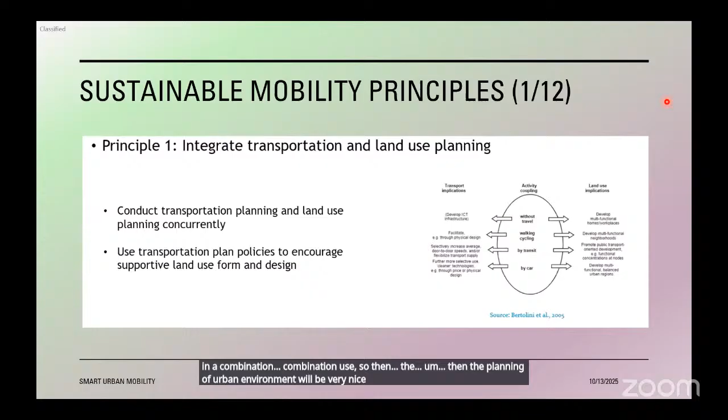And protecting environment - all sustainability will start with protecting environment. That's the first thing. It could be going green, less power consumption, renewable energy, using green energy, using ecological energy sources, alternative vehicle management. So all of these together come under looking at environmental protection.

Efficiency also improves when we have better environment protection there. It could be usage of natural gases, it could be usage of less air pollutants. All of these contribute to the overall sustainable environment.

So, social objectives again, right? When we are growing into this sustainable mobility, are we disturbing any social objectives? Livability, also social ecosystem, urban environment, urban social living. So that's the reason more cultural differences are going to come if we have any disturbances with the social living.

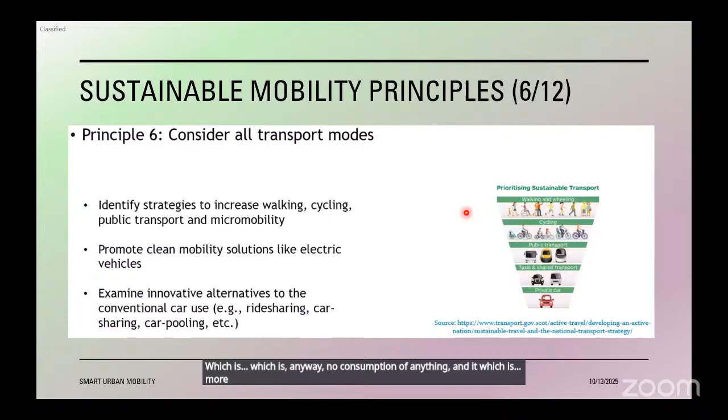And then, so these are different types of modes. Again, it's strategic transportation, which will be giving us transportation demand management. So the demand of vehicles, demand of incoming, is depending on the people coming into the cities, right? So that's where the congestion will be reduced, which will improve the future of the city, and then also less pollutants could come into the cities.

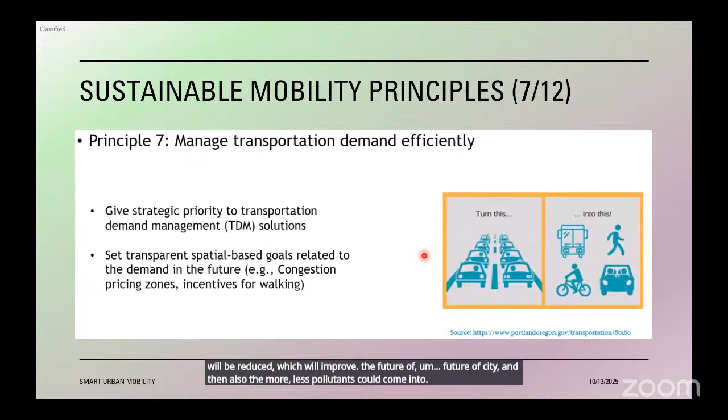So efficient way of transportation, with more supply friendly, and identifying different strategics, multimodal capacity of current infrastructure. So this is one of the aspects which I would say is well defined in developed cities, like you can see Paris, one example I could say. Also, London infrastructure is also another example, which is using this transportation very efficiently.

Like, okay, so if someone wants to go to his work location from his home, most of the times they have metro, but to reach the metro is not easy because they need to take again a bus or something, right? So rather they can take their own bicycle or EV scooter, and that can be carried within the metro, and also in the public transportation.

Then once they got down, they can use their EV scooter to go to their workplace, where EV charging facilities are provided in the office space, and they can get it charged and come back home in the same way. But I see this moving forward will become very big, and which will also enable that we do not need to use more vehicles here, but this really needs infrastructure development to be there, because safety concerns could come if you are driving on the same car path or bus path.

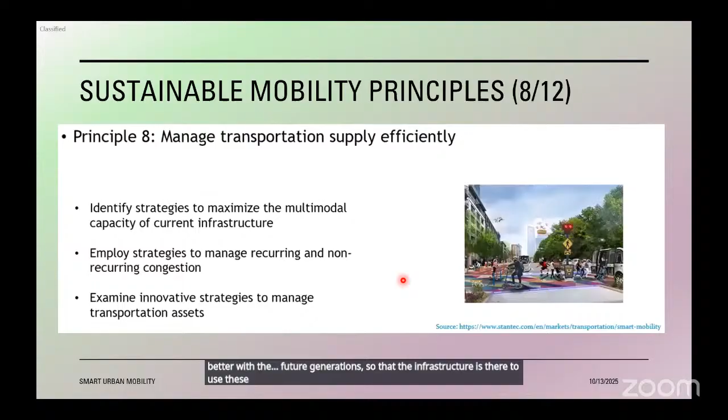So to make these ones, the strategic priorities, development priorities, the management priorities need to start from infrastructure development. These infrastructure developments need to start with the exploration, and then making those decisions at the right time, so that the installations could happen, and those move to implementation, and then the availability of development.

Also this needs cost, right? So it's nothing comes for free, so which will also improve. A lot of financial guidance is required to the governments, also to the management, financial institutions, to start funding and start looking at the gaps in the overall infrastructure. Also it improves the overall living standards.

Once these improvements have happened and cost has been spent, what is the return on investment? Whether those investments happened the right way, or return on investment is properly monitored or not, there should definitely be a framework which could improve the overall process. If there is no framework, it's all done and dusted, it won't give any indication that the improvement has actually happened.

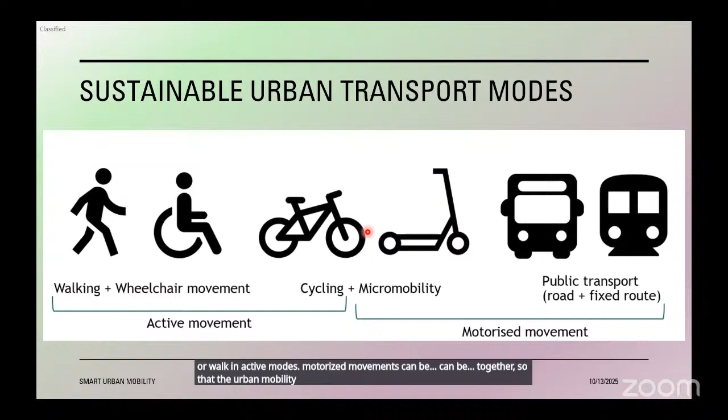So, main goals and general benefits for sustainable mobility.

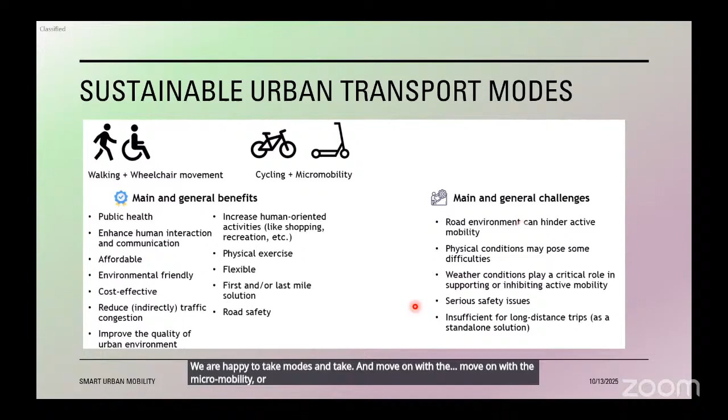With public transportation, it's more about roads and fixed routes - how we can benefit from each other. The main challenge is there's no possibility of a door-to-door solution with a fixed route bus or metro. The metro definitely has a fixed route - from that fixed station, we have to continue by walking, cycling, or motorbike to reach our destination. So that is not flexible, it is never flexible.

Is it time effective? Maybe yes, it is effective on time because we are not getting into traffic - there is no traffic congestion. It actually reduces traffic congestion if we are going by metro, but a bus may not offer the same benefit. Metro is more traffic effective and also socially effective, and the environment benefits more too. But for this infrastructure, we will go deeper into plans for how this could improve our overall life.

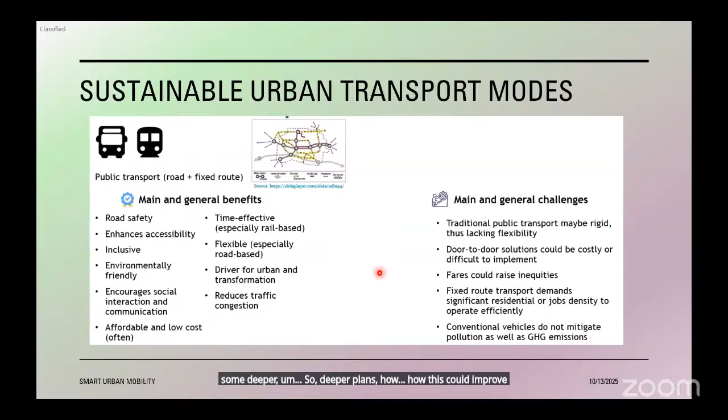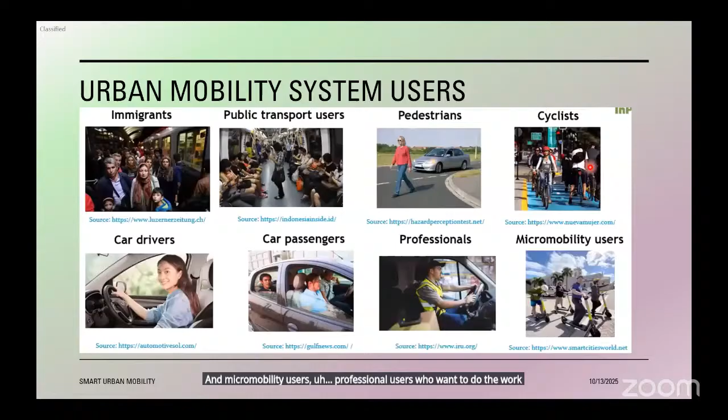So, urban mobility system users - who are all the different users using this mobility? Different people in daily living use urban mobility. These are all different people using different modes of transportation from one place to another in their daily living - could be immigrants, transport users, pedestrians, micro mobility users, professional users who want to do work, passengers, and car drivers - different people.

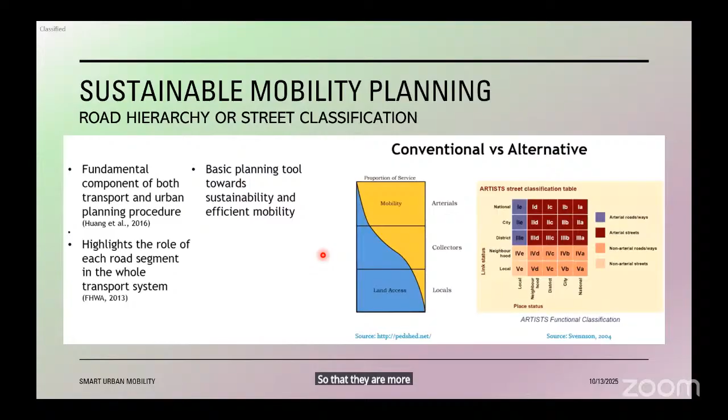There is a road hierarchy, or street classification. What are the different modes that could help us - whether implementing conventional or alternative modes between both? Fundamental components of transport and urban planning procedures are very important for city infrastructure development. There should be basic planning tools in place so that the system is more efficient and more mobile in urban living.

This is a road hierarchy or street classification diagram. You can see the city from 2021, which is a conventional city - they only have motorways, shown in black, the outer ring roads. They don't have anything else, and the rest is all primary infrastructure development. They do have metropolitan centers - multiple metropolitan centers in different places - but the transportation has congestion, and this congestion is increasing road congestion. It's also not environmentally friendly.

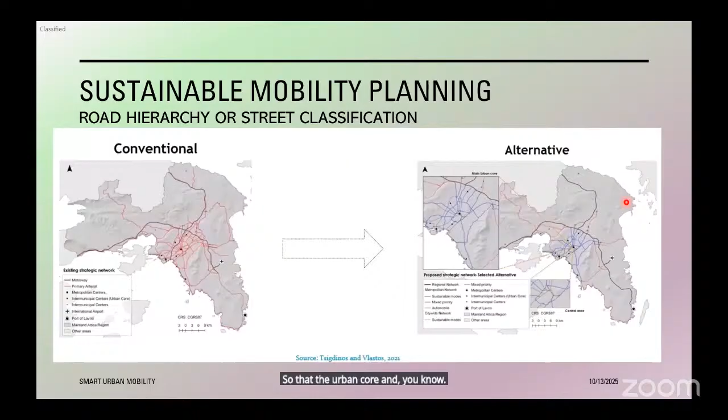Alternatively, they could think of mixed transportation - a regional framework with motorways, the black routes, but also an increased metropolitan network with metros, the blue ones, and mixed priority routes using sustainable modes, which we're talking about now - roads, metro, cycle paths, walking paths, all mixed networks. Then distribution happens across the city so congestion areas are reduced, and urban core living is taken care of in more sustainable ways.

So here is another example comparing the current model and the super blocks model - different models used in urban living. What is the current situation and what are super blocks? You can see the single usage, the right way of doing it, or you could say the wrong way of doing it.

This is one of the cities, in Spain, Barcelona, which is a more sustainable city. I think in the last 3 or 4 years they have won an award for sustainable mobility and planning. So what they brought in is an old style model and then a super blocks model.

In the old model you see cars, metro, and cycle paths. In the super blocks, no one can enter with a car inside the super block. So if somebody wants to use a car, they have to stay outside the super block model, and inside is only cycle and walking paths.

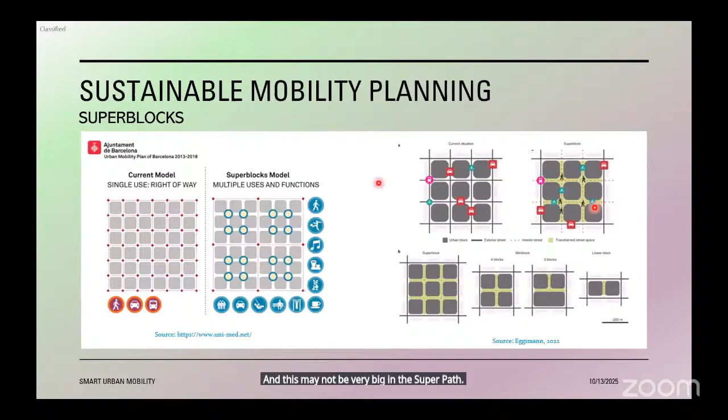This way, they are not allowing vehicles with more pollutants into the super block, so there's a recovery of air pollution happening within it. The super block has more trees and only cycling and walking paths. Transportation is taken care of, and even though it may not be very big, the healing of the environment, sustainability, and mobility are all taken care of because of these super blocks.

In these super blocks, mostly restaurants, play areas, coffee shops, public living spaces, and parks will be there. So cities could come back and build these kinds of super blocks, so that healing of sustainability and environment protection happens along with this type of implementation.

This is another city example, a city we have not yet seen - the future capital city of Andhra Pradesh, which is going to come with this kind of planning. It's mostly defined here as the current model and the super blocks model.

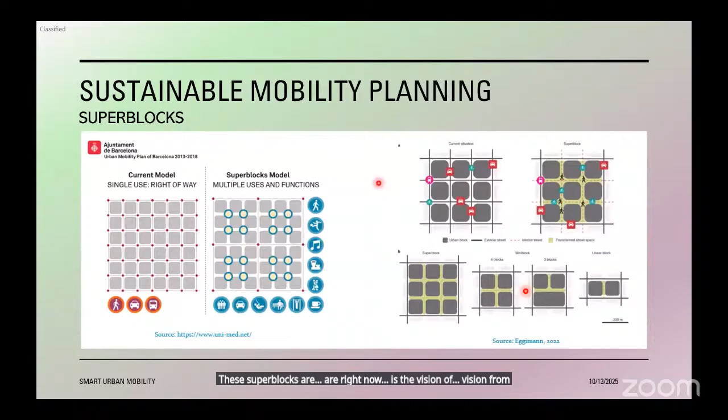These super blocks are right now the vision of the government, which clearly mentions passive zones, active zones, and protected zones. The green zones are passive zones, P2 are active zones, and P3 in blue color are protected zones. The protected zones are more of a sustainable environment where no vehicles will pass through - they are clearly protected and kept outside so sustainable growth can happen.

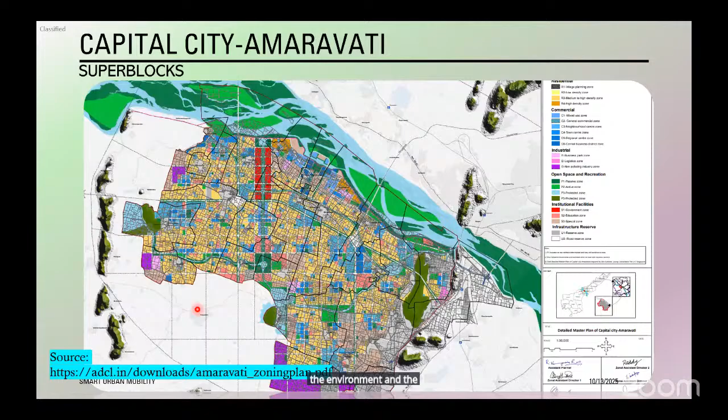There are clearly defined commercial zones, residential zones, and industrial zones. Hopefully whatever we are talking about today is taken care of in this map - this is a perfect example of super blocks where environment and sustainable mobility are taken care of together.

Along with super blocks as building blocks, we need multimodal corridors built within the city infrastructure and within the streets. Here is a traditional route, an hourly route.

You have different lanes, and those lanes go from one end to another, transporting people from place one to place two. At the same time, here is another way of doing it - there's a bus lane dedicated for buses alone, a public path with a parking lane on the side, but sustainability is taken care of. There's a green space only for walking and cycling, with trees, along with the parking.

But this needs more space, and in city infrastructure today this kind of space is not available and not being considered. You can see how many people can be transported in these two different environments - the total capacity of the first is only 12,300 people per hour.

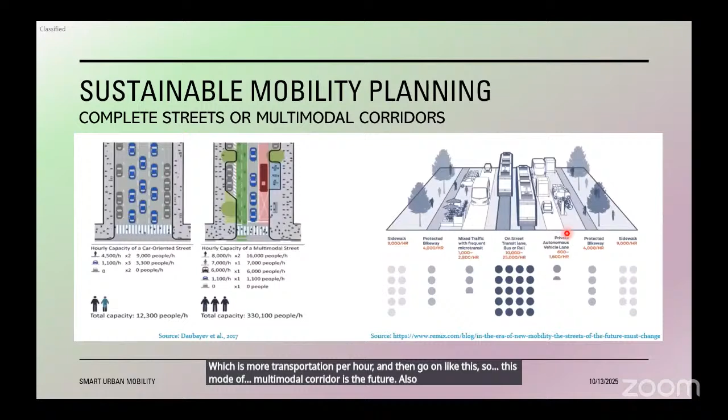Here you can see, for different modes, how many people can be transported per hour. Sidewalks and footpaths are very high, only 9,000 people per hour. Protected bikeway could be 4,000 people per hour, and mixed transportation is 2,800 per hour. On-street transit lanes, like metros or trams, transport more people per hour. So this multimodal corridor is the future, which is also environment friendly and sustainable.

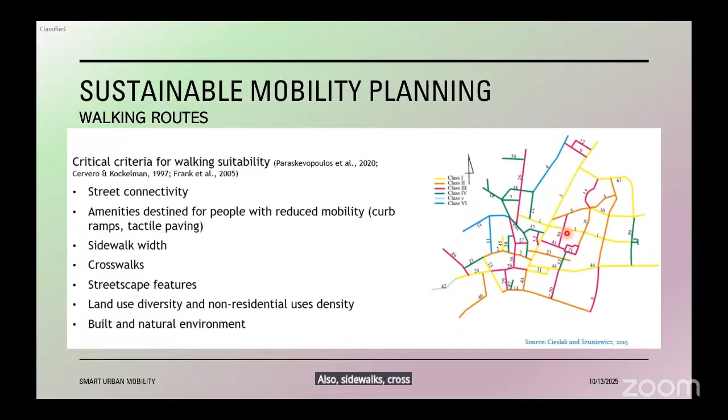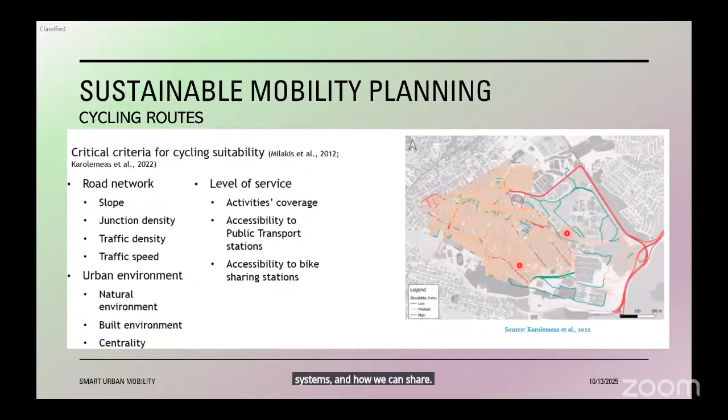Different routes, again connectivity, sidewalks, crosswalks, environmentally friendly and natural. So this is more about the road and rail network, how it can be utilized in the public transportation systems, and how we can share things from one another to make moving easier.

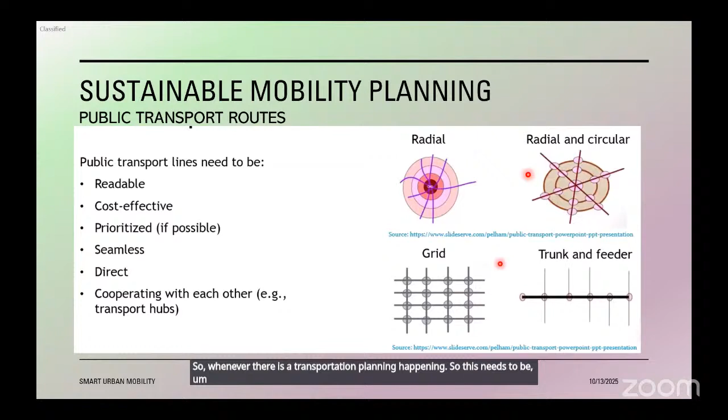articulated properly, meaning the color codes of different routes are not properly designed, or it is not readable, and it is not cost effective in the planning. So fewer people will be using it, making it less effective for current generations. Whenever transportation planning happens, this needs to be taken care of, so that it is more effective.

This is about urban development. What I mean is, we saw the super blocks earlier. Within the super block, the transit orientation should be there, so that the super block becomes more circular and friendly, with everything happening within the super block.

Another example is a city like Bangalore. If you look at one area in Bangalore, you will find everything in that area, so a person need not move out for anything. That's one thing I like - everything should be within walkable distance, and a person need not go far to find something else. The transit orientation development should happen like that, so wherever there is demand, everything should be concentrated and focused in that area, so urban mobility and urban living happens within this area, not crossing into other functional areas.

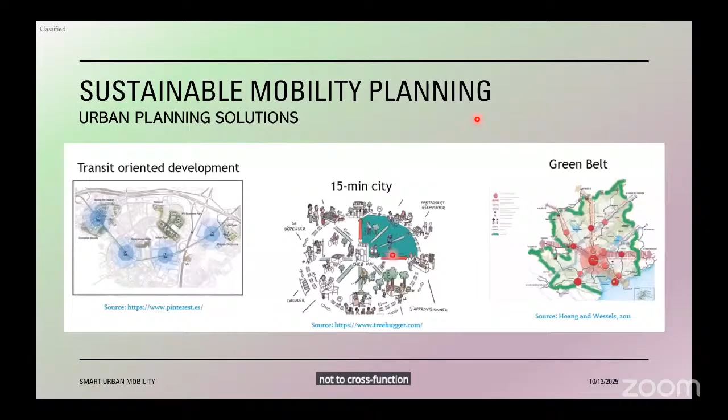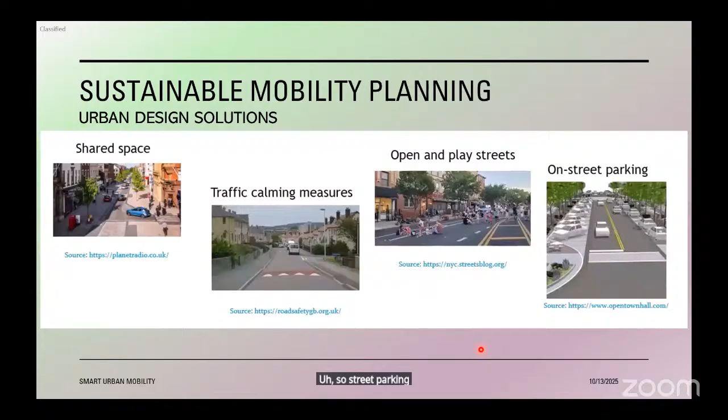These are more design examples for urban living - shared spaces and traffic calming measures, maybe play streets, open streets, play parks, and things like that. Street parking, instead of everyone having their own parking space, street parking and similar measures.

So the key takeaways - I've listed down a couple of them. For example, intelligent transportation systems: traffic flow, signal flow, real-time monitoring, and guidance to drivers is still not very good. A lot of AI engines need to be developed for different traffic flow directions, so traffic can be diverted to different routes, which could help traffic congestion measures.

Depending on the movement of traffic flow, people could be guided to different routes so that they don't end up more delayed in reaching their destination. So shared mobility needs to be improved.

This could include car sharing, ride sharing, reducing private vehicle ownership, and bike sharing, those kinds of things. Also EVs - electric vehicles reduce air pollution and noise pollution, but at the same time, battery life is still not high, so they need to be scrapped after 6, 8, or 10 years. This is again non-sustainable - we say it's sustainable by using electric vehicles, but the battery is not easy to scrap, and a lot of carbon emissions come out from that process.

Yes, so any doubts till now with whatever I presented? Any doubts in that particular presentation? Okay, that's good, that's good. I'm happy for your response, because when it comes to online meetings, that is a challenge. We will not be able to know until you speak what's there in your mind, right? That's good, thank you.

Now let's come to one of the application areas of internet, that is internet of vehicles. Let's see one by one what exactly internet of vehicles is and how we are going to use that. In the previous explanation, I already covered some parts of IoV, internet of vehicles.

So instead of applying internet connectivity between home appliances or small models, we're going to connect the ECU, the electronic control unit of the vehicle, or entire monitoring unit of the vehicle, to another vehicle through the internet, or to another service station or any public platform. That's a simple explanation about that.

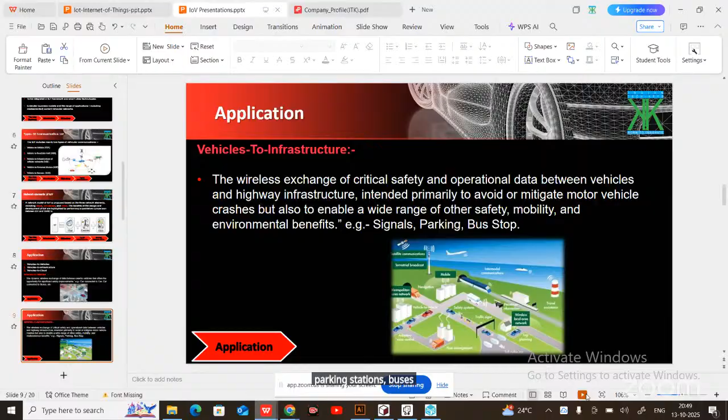So in such cases we can have vehicle to vehicle communication, vehicle to buses, connected buses, and vehicle to infrastructure - with respect to factories, hospitals, parking stations, bus stops, and bridges. Vehicle to infrastructure communication is really a necessity of the current trend, because whenever we want to reduce traffic, we would like to have a safe drive.

Whenever there is any construction going on in a certain road, I would like to avoid that particular area. Or consider a location where there is a rule by the government saying it has to be driven within 60 kilometers, that means a speed restriction area. In such cases, why does a traffic police have to be present in that particular area to monitor and penalize users who are crossing that particular speed?

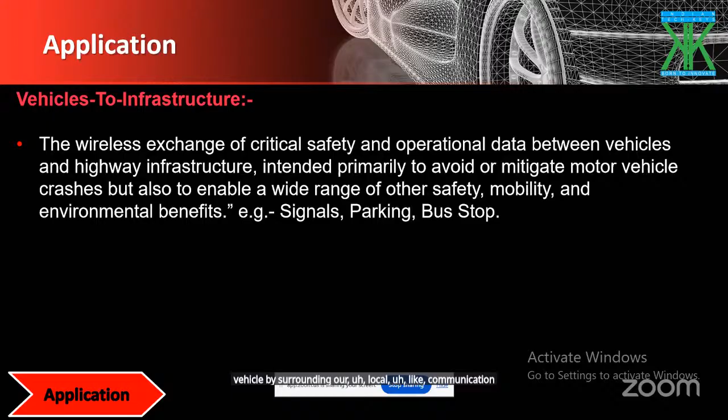Instead of that, why can't we make a vehicle to infrastructure communication, where the vehicle communicates to that particular infrastructure - that particular locality. If the speed limit is 60, even though the user is pressing the pedal, it still should not go beyond 60. The vehicle itself should monitor the user, rather than someone else having to stand there and monitor the users, through surrounding or local communication.

Also with respect to signals, many cases as I observed, the signal will be very far, where we will not know whether the signal is about to stop or whether I have to start my vehicle or not. Many cases what happens is people keep their vehicle started, keep it in neutral mode, and keep waiting for the signal to release. At that time, CO2 will be released up to a certain level, and the vehicle will also have trouble due to the idle position.

So many things may happen. Instead of that, we can display the live status of the signal - what is the current duration, 30, 20, 28 seconds, updating every second. Why can't we display this in each and every vehicle, so that the user can take a decision whether they can pass this signal or not, or whether they have to move to a particular speed. All those things they can get information about.

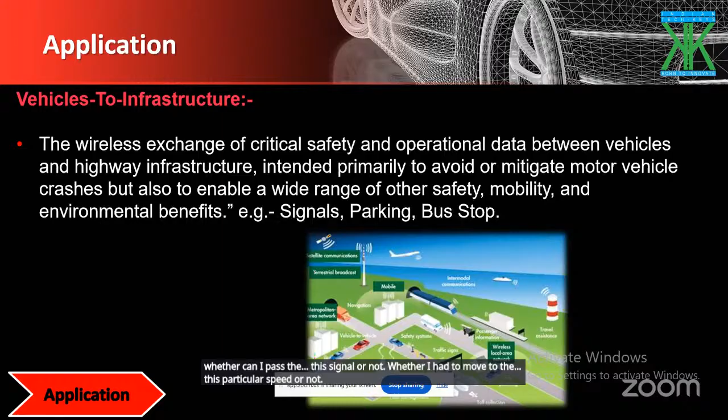So next is vehicle to cloud. Instead of what I explained in the previous slide, that can happen even through local communication. There is one traffic light signal in front of my vehicle only. I can transmit the data over the wireless - I don't need internet for that.

But whenever I would like to know where all the traffic signals are, where the easy route is, what the current status is, or where the nearby hospital is - whether I get a hospital after 5 kilometers or 3 kilometers - through GPS we can do it, but if it is connected over the internet, it will be more beneficial.

Accident information - GPS nowadays will not give you the accident information, whether the vehicle met with an accident or not. That information will not be available in GPS. So with IoV we can do that.

So VANET, as I mentioned, is like an ad hoc manner where different moving vehicles and other connecting devices come in contact over the wireless medium and exchange useful information.